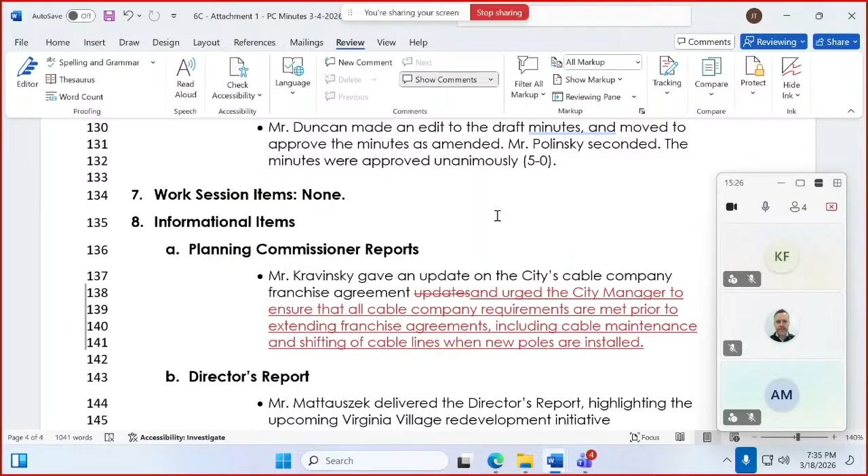Okay, that brings us to our work session. We're here tonight to discuss the 258 North Washington Street site plan. Welcome. Good evening. I'm Jeff Hollern with the planning team. Tonight you're being asked to review a site plan application for 258 North Washington Street for the Park Washington Apartments.

The applicant is proposing to add an addition to the existing historic home on this site, which includes a 3-story building containing 8 new apartments. The site is within a T1 zone and neighbors several B1 businesses along Park Washington Court.

Staff received this application on February 23rd and completed their first review on March 11th, which generated the letter and comments you have in your materials, shown right now. Several issues have been identified, including informational and technical items related to sewer and stormwater management, requiring additional clarification and review. The plans as currently submitted also have several inconsistencies with the city's comprehensive plan and downtown small area plan, especially regarding how new development interacts with historic buildings.

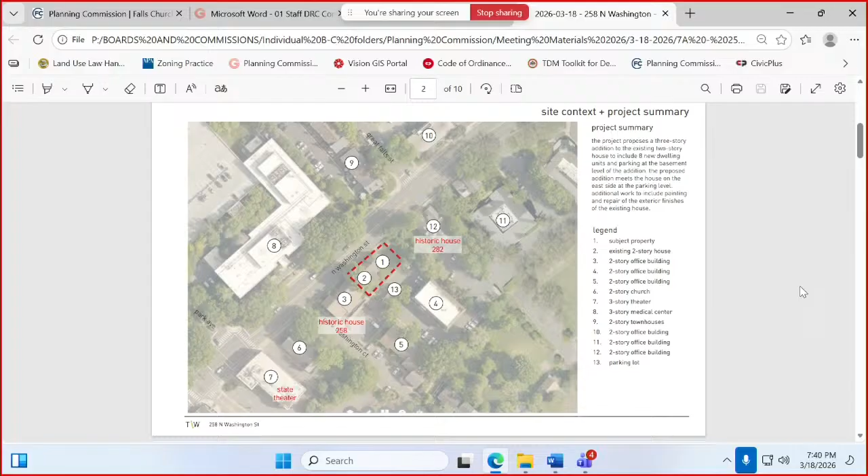I know all of you are familiar with the site, it's just like right over there. But I'll start with just some context here. So this is located along North Washington Street. It's a couple doors over from the State Theater. It is on the edge of the downtown Falls Church POA, and as Mr. Hollern mentioned, is in the new T1 transition zone. The existing house there is one of the 4 historic properties in that T-zone. The lot is around 9,400 square feet, which is about 0.216 acres, which plays into the density that we're allowed on the site.

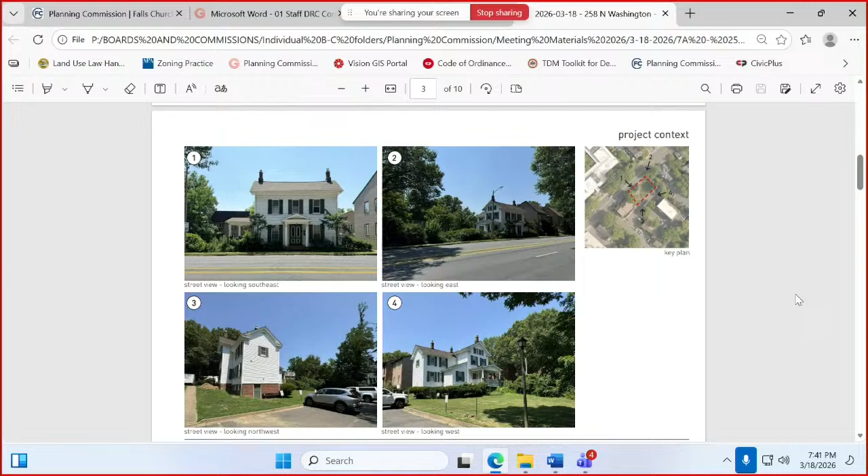The historic farmhouse sits on the southwestern portion of the site, with a significant open space to the northwest, and you can see that in the lower right photo. It's essentially underutilized space, it's an empty lot there, empty green space. There is a significant grade change across the site, it's about 8 feet of vertical elevation change from the sidewalk along North Washington down to the parking area at the rear.

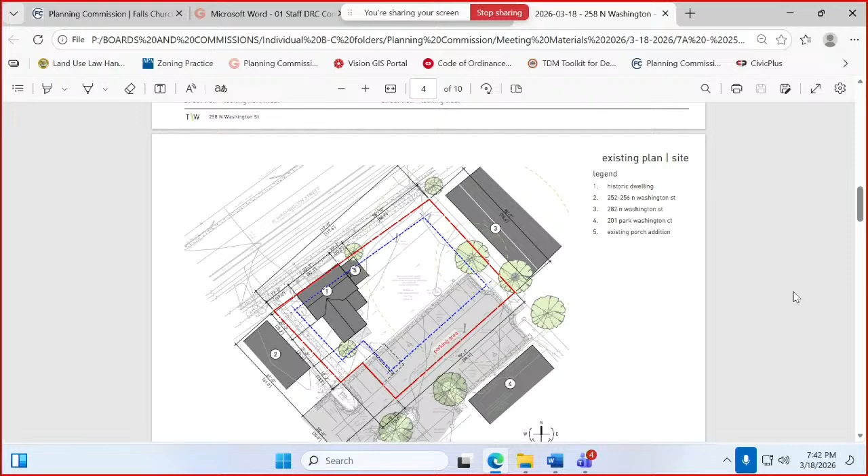So it's a pretty oddly shaped lot, it's trapezoidal in shape, and with the required setbacks that you can see in the dashed blue lines, it just introduces some difficult geometries that we're navigating with the new building. The new building will sit in that area between two historic properties, 258, which is on our site, and 282 North Washington, which sits to the northeast. These are both gabled farmhouse-style structures, with 282 being a little bit more of a Victorian style with more of the kind of gingerbread that you might see on that. There is an asphalt parking area on the southwestern portion of the lot, and that is shared with the property to the southeast. There is a shared property line that runs right through the middle of a shared access easement to that parking, so that's right along that property line.

So I'll just go over some overall project goals here. As Mr. Hollern mentioned, the project is proposing 8 new additional units in addition to the existing single-family residence of the farmhouse. The project would include a single ADU, which would meet that 10% threshold requirement, and that is being offered at 80% AMI. The project does propose a mix of 1, 2, and 3 bedroom units. And while this is a small development in terms of unit count, it provides a diverse mix of residences. The average unit size is around 1,300 square feet, and this is desired by our client to offer flexible units for families of different sizes and the potential for aging in place here.

The gross square footage of the building is around 9,700 square feet in the new building, or the addition, and around 2,900 in the existing house. We are proposing 9 parking spaces, which is the 1-to-1 ratio that was mentioned. There are also a couple of tandem spaces located underneath the building, and those are really just unit amenity or owner amenity spaces.

We are setting back from the existing house. You can see it. We're kind of zigzagging around the building there, and we're only touching it with a small terrace that meets at grade and below. Part of that was just to try to introduce some breathing room between the two buildings and the two structures. We are also proposing the new building entry on the far east corner to really just add more separation between the existing house and the new entry.

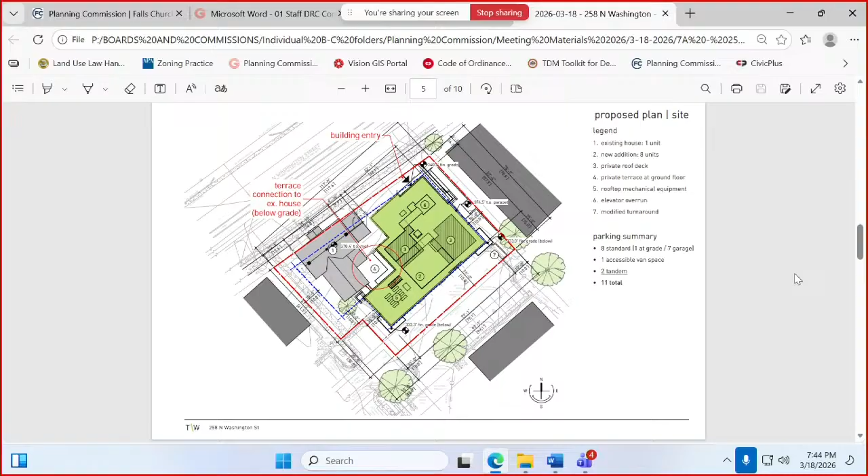This is a rendering concept view looking towards the southwest. Here you can see the entry of the new building on the left here. Again, we're trying to just create some separation between that porch entry of the existing farmhouse and the new structure to the left. We are introducing a covered porch on the new building and lining that with a wood material to soften that entry and make it a little more humane as you come into the building. On the porch on the right side, at one point we had some of the earlier schemes that maybe you've seen and we presented to HARB earlier.

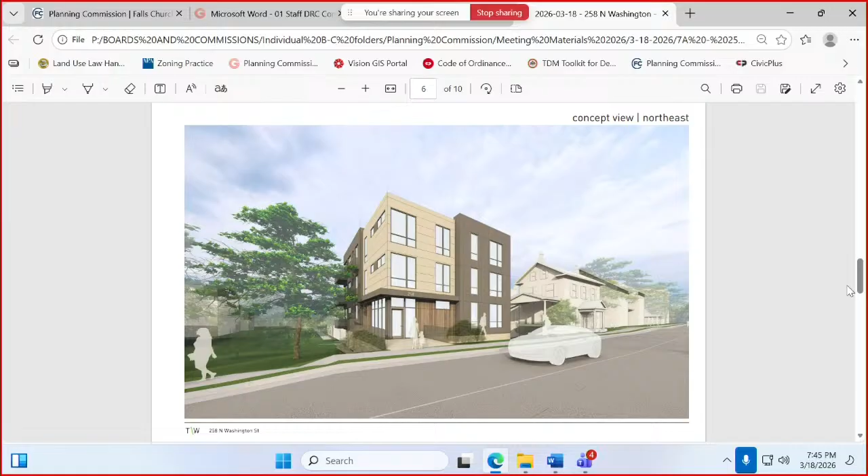Those earlier schemes had proposed removing the porch that's on the left side of the historic structure, but we've brought that back. Although it wasn't original to the building, we think it helps retain some of the architectural character of the farmhouse and helps to put a little more distance between those two buildings.

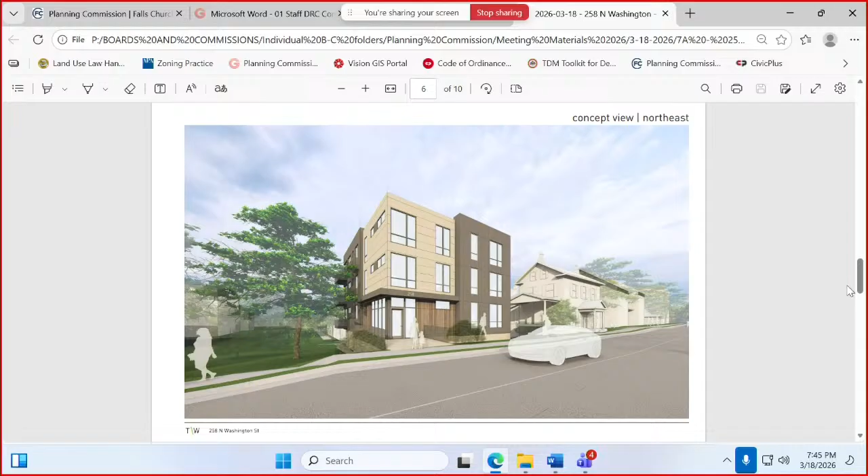From a massing standpoint, we really tried to keep it pretty simple in terms of forms and really just looking at simple materials and more of a modern aesthetic to it. It is a 3-story building. It's roughly 38 feet tall.

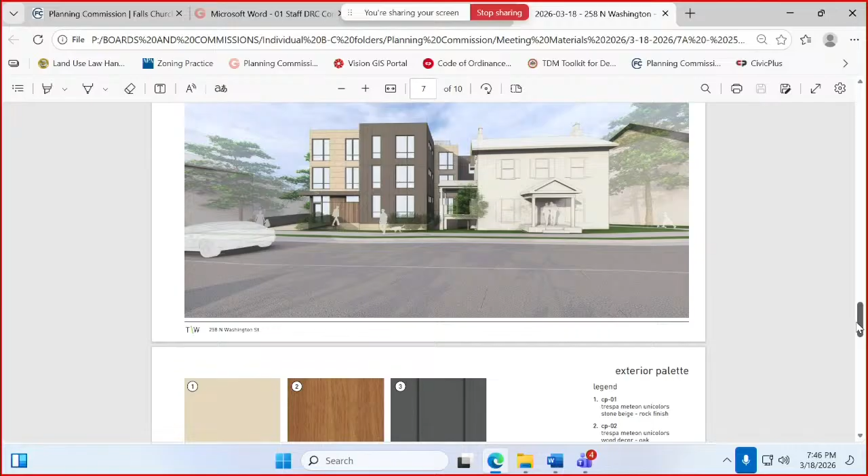Here you can see that porch element that we're retaining between the two buildings, that we brought back to help retain some of that character and to put a little more breathing space between the two buildings. And in this iteration, we are really looking at treating the new building almost like a modern expression, and really just trying to be distinct from the two buildings.

And I know we've gotten some feedback from the Architectural Advisory Board, and we haven't had a chance to react to that yet. We just got that info last week. We are working on that, and we plan to have some of those iterations within, I think, a week or so to turn them around, so we're working on that now.

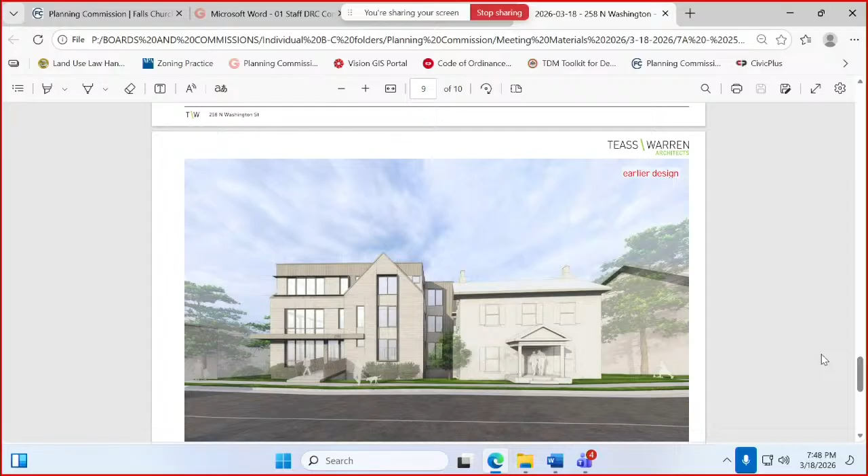But with that, I will conclude my presentation, but I'm happy to answer any questions that the commission may have.

Thank you. Great, thank you so much. I'm sure we'll have some questions. Who would like to begin? And yeah, Jack, if you could just leave that one up, I think that would be great. We can reference the presentation.

Any takers? Where's Danny? Danny, do you want to start?

So I listened in to the Architectural Advisory Board conversation last week, and I think one of the big points of emphasis from them was the difference in the newish building, the new apartment styling versus the historic nature of the original building that's currently in place. I know you said you got the feedback last week and you're working on that, but what are you thinking, what's the thought process around - is it possible to marry that? Are you thinking of marrying that? Are you still leaning towards more of a distinct style?

I think what we're trying to do is, I think it's probably too different right now, and what we'd try to do is introduce a little more material that's more compatible, like maybe a brick or something, and then a little bit more siding, or a finer grain - maybe not siding, but something a little more fine grain like siding is. And then one of the main things we're really looking at is breaking the massing down to really read like a 2-story with a 1-story piece on top of it, versus a 3-story read. From a massing standpoint, I think that would help bring it more compatible with the two neighboring structures.

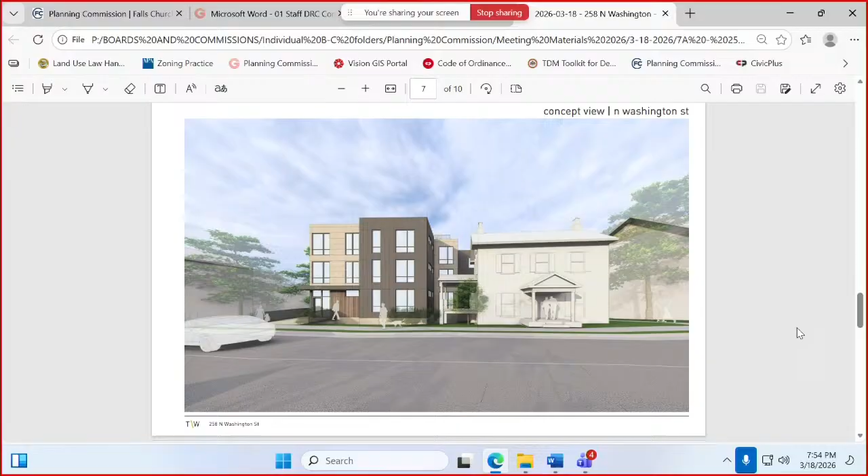I'm not an architect, but from my perspective, the original design presented to HARB has some interesting aspects in terms of how it fits in Falls Church. It's a real modern design, and even though that's my personal preference, there are people in the city who don't find that attractive. The gable work on that original design speaks nicely to the pediment on top of the porch on the historic house. But I figure no one knows better than the people spending the money to build it which piece will be most attractive to the marketplace, so I could be comfortable with either.

Staff pointed out a need for 3 bike parking spaces, and I was wondering where those would go. I think there are 3 short-term and 3 long-term spaces. We're looking at putting the short-term spaces to the left of the entry, where there's a pad area, which makes the most sense from an access standpoint so visitors could use those coming in the front door. The other area, we have a space in the garage below dedicated for bike parking.

Would the garages be pre-wired for an EV charger if somebody wanted to put one in? Probably, yeah, we're looking to do those. We've had pretty good success with the townhomes that have gone into the city recently—they've been pre-wired for EV, and some were pre-wired for solar. I realize you're going to have a green roof too, so that's good.

As far as energy efficiency goes, are you just going to build to state code, or go a bit above that? It'll probably be a little bit above that, we almost always do more. We're not currently entertaining any certifications like LEED on the property, but from an energy efficiency standpoint, I think we'll be a little bit better than code, that's typical for our designs.

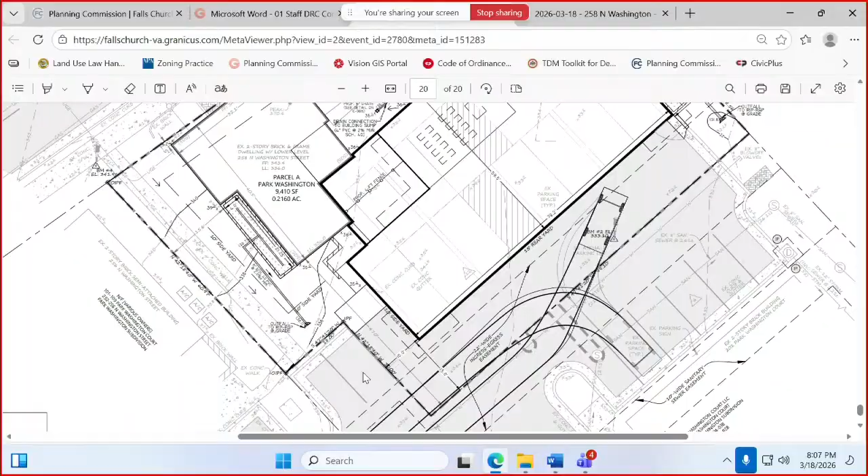So one's outside, the other 8 are inside, and then there's 2 tandems on the left side of the building that are also under the building. But just so staff could confirm, tandem spaces, you can provide them, but they don't count towards the parking space requirement. Yeah, we're not counting those for zoning compliance, those are just an additional amenity. So how do we get to the 11? We got 8 underneath the building, 1 outside the building, that's 9, plus the 2 tandem spaces, but they only need the 9, because there's 9 units. Maybe there should be a unit match.

A note on the sheet should make it clear that under our ordinance, you're only actually providing 9 spaces the way our ordinance defines parking spaces. It might be more accurate to put an asterisk or indicate 11, with parentheses noting 2 tandem, to make clear you're meeting the minimum requirement, not exceeding it.

And the elevation shows overhead doors. Are you intending to actually provide overhead doors underneath the building? The intent right now is to just have them roll up. So residents would have a remote, or they could program their car to open those doors to get in and out.

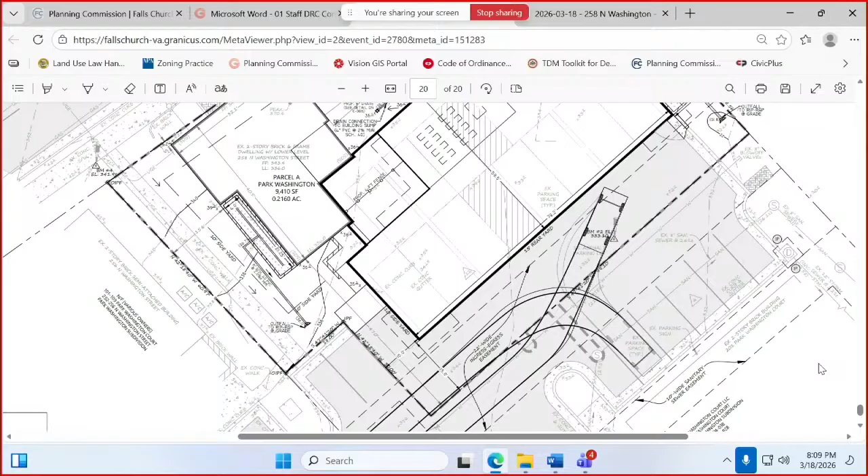I know not everyone on the commission likes to talk about parking, but on this site it's very conceivable people will need a car. If they can't fit or the spaces don't work, you're going to put a burden on the adjacent commercial owners, who I'm sure will put up signage saying don't park here, for example those spaces across what's today a common parking area. I know it's owned by a different entity, but I'm sure they'll be signing it saying don't park here. That's going to be an issue.

Unlike our other T-zone projects where there was a lot of on-street parking, there's really not here. Obviously you can't park on Washington, though there are some other streets nearby potentially. I'm thinking of access for Amazon deliveries and other things. I'm foreseeing there'll be some burden placed on the adjacent commercial owners in this area because it's going to fall on them to police that. But again, it is what it is.

All right, I think those are my main comments. Otherwise, there are no other site plan waivers being requested, correct staff? There is not, no. So that was my main question. I'll leave the architecture to the architects.

I hope you continue to improve that. But again, this is just another cautionary example of how letting things be purely by right implies that we got the ordinance totally correct, and we probably didn't. Hopefully we can learn from this and staff can continue to think about this, and maybe there are things we want to tweak as we get more experience with the T-zone sites.

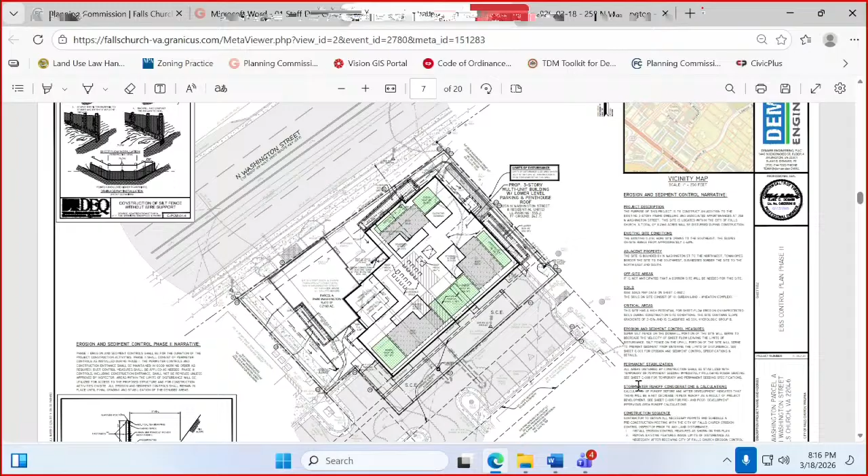Yep, from the green area that's shown on the roof, like the roof garden. That corner of the building right there is the closest, it looks like. Okay, I misunderstood. I thought it was to the property line.

My other questions really had to do with, I'm glad that somebody's looking at the parking. I did have some concern too in the garage floor plan. There are no columns in that space from front to back. And I think a column would present a little bit of a navigation difficulty, spatially. So right now, there's a span that's over 40 feet.

So I would really question how those parking spaces are laid out because the columns aren't in there. I was surprised, I didn't think you could have a over 40-foot span down there in the basement. And I don't know what sheet it's on, but the presentation is a little bit different than the sheets that we got. So I'm a little bit concerned about the intent later, if there's discrepancies through the documents, like what document are we actually talking about, what sets the intent of what's been approved.

And we saw it on some previous projects where we thought, well, the applicant really didn't mean it, or there was an extra layer on, and then after the applicant moves in we see that there's actually curb cuts still there, because it was on the original document and never got cleaned up, so it became part of the intent of what was approved. So I want to be clear about what the designated agent is approving in the intent of the documents, just to be aware of that moving forward.

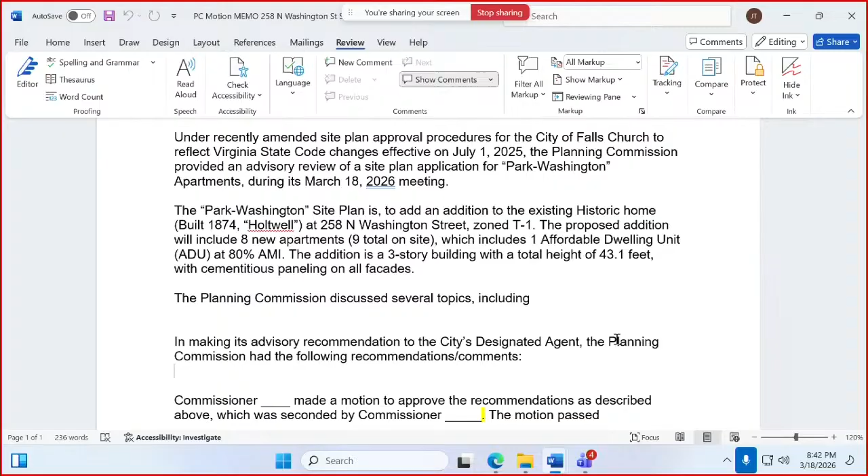Okay, following recommendations, Jack, I think we can trust you to capture the topics discussed after the fact. Is that okay? So what specific recommendations did each of you have that you'd like to include here? I heard a few from you, Ms. Friedlander—the city arborist looking at the tree species.

The city arborist looking at the tree species, the viability of the trees post-development and during construction. I'll wait for you to catch up. You were concerned about the historic house remaining in the pre-construction state, and about the renderings of the historic house. Yes, I was trying to come up with words to capture that it remain in the pre-construction status. I don't know if that captures what you have in mind.

In other words, they don't change it. The discrepancies in the documents are not an indication of any approval or acceptance of revisions to the historic structure.

I think the plans are pretty clear that it's not being touched, but the elevations include that don't match what's there today, and the elevations and renderings we saw tonight also don't match. I think when there's a discrepancy—and we've seen it happen on other projects—what ends up getting built lands in some of those discrepancies, where what was approved or discussed was the opposite, because everybody says, oh, that one was a mistake, or there's always a reason.

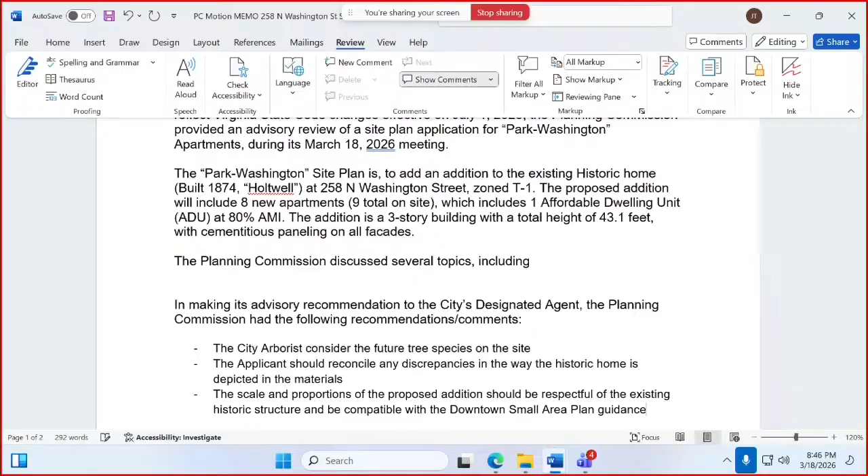Mr. Krasner, did you have an addition? The only tangible thing I had was noting that they're only providing 9 parking spaces plus 2 tandem. Depending on how you want to say that, if you're going to keep it at 11, you should have an asterisk or notation indicating 2 of those are tandem, so per the ordinance you're only providing 9. Maybe just indicate which parking spaces are tandem spaces.

The table right now shows 11. They have a zoning table on the sheet showing 11 spaces provided, but technically they're only providing 9. So if you want to mention the other ones, you need to indicate those are not defined spaces under the ordinance. However you want to note that, I think you understand. I think Ms. Friedlander has a suggestion on that one.

I wanted to add onto that, to get an actual layout with the structure and the layout of those parking spaces, just to make sure that it works.

So we have the 2 tandem parking spaces should be indicated in the materials, and a dimensioned parking plan should be provided, coordinated with the structure considerations, to confirm the parking is coordinated with the structure.

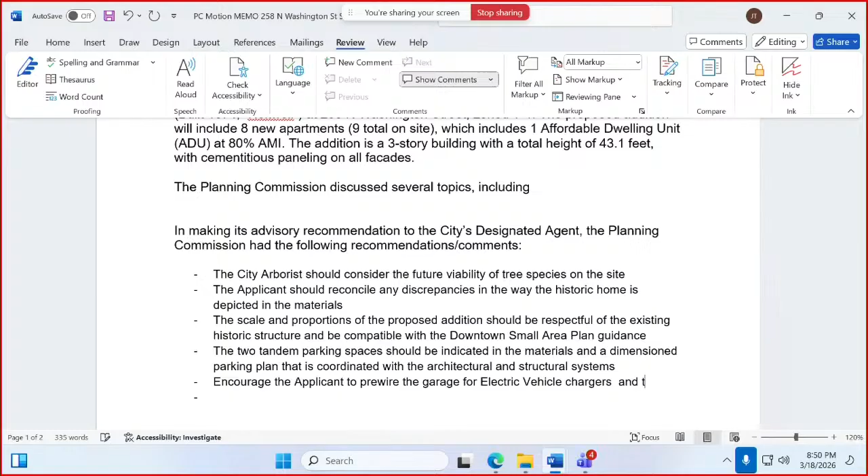Thank you. Mr. Kravinsky, did you have one? You got to finish this. Oh, good: encourage the applicant to pre-wire the garage for electric vehicle chargers and to achieve above code energy efficiency.

Thank you, Mr. Stevens. Mr. Kravinsky, I think this is different from the comment about scale and proportion, but do we want to make a comment that we encourage the applicant to revisit the original gabled design from 2024? I don't have strong feelings about that. Do other folks want to make that recommendation?

I think there was some discussion that the square design was not as compatible with the historic structure. I don't know, does anybody have thoughts?

I like the juxtaposition personally, my personal opinion, of the modern with the historic structure. I think incorporating the materials to sort of speak to that historic structure would help in that regard. So I prefer this design personally to the gabled one.

I think we kind of start addressing that here with the scale and proportions of the proposed addition should be respectful of the existing historic structure and compatible with the downtown small area plan guidance. That doesn't speak to the materials though.

Maybe we could add to that, or talk a little bit more about changing that. I thought there was some discussion tonight about the gabled roof being more compatible, but you make a good point—maybe what you're going for is the juxtaposition of the square and the gabled design.

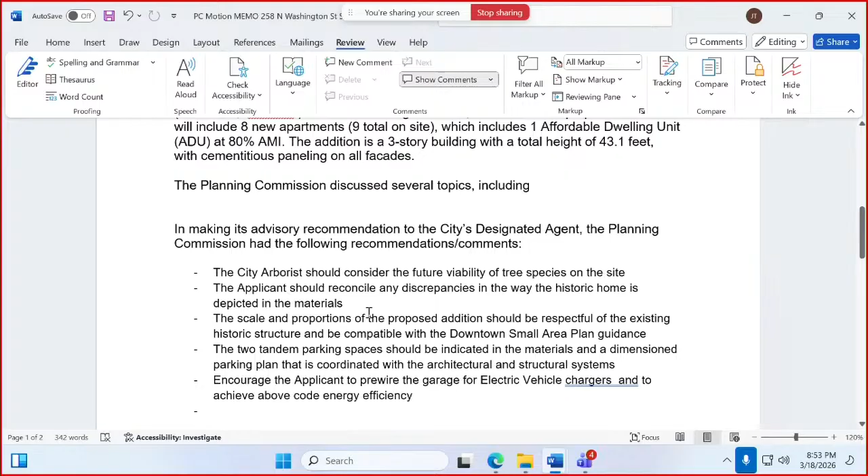Okay, that's where I'm coming from. Could we add materials into this recommendation though? Could we say the scale, proportion, and materials of the proposed addition should be respectful of the existing historic structure? Because I feel like we did talk about materials. Is that okay? So it would be scale, comma, proportions, and materials.

Well, it's design too, though, right? Sorry, what was that, Mr. Stevens? Did she have design in mind as well as materials? That might be what I was trying to get at. So do you want to say design, comma, scale, comma, proportions, and materials? So in front of scale, put the word design, comma, space. Does that make sense?

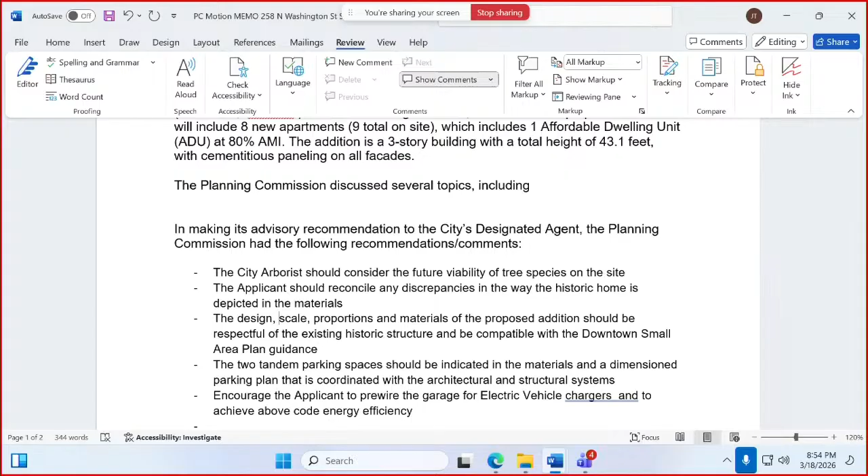That gives the applicant the flexibility not to say it has to be X, Y, and Z specifically—very general, but it gives room. Okay, is that right there: design, scale, proportion, and materials of the proposed addition? Yep, yep. Okay, I'm gonna turn this way.

Anybody over here have anything to add to the list of things our designated agent should consider? Mr. Duncan: my addition is to ask the applicant to designate one of the multi-bedroom units as affordable. I'll give you a pass on telling us how much any of the units will cost if you give me that first one. And I do think it would be appropriate to ask for clarity on multi-bedroom units—he mentioned there might be 3 bedrooms, so that could be a 2-bedroom or 3, as long as we don't cheap out and just do 1-bedroom. That's my objective. Okay, you got that, Jack.

The other thing is to make sure the materials show with clarity where the service delivery location is for all the Ubers of the world. We ask for that now reliably on any special exception building, and I think it's appropriate to get in the habit of asking every developer to think about that from the start, not as an afterthought. Thanks.

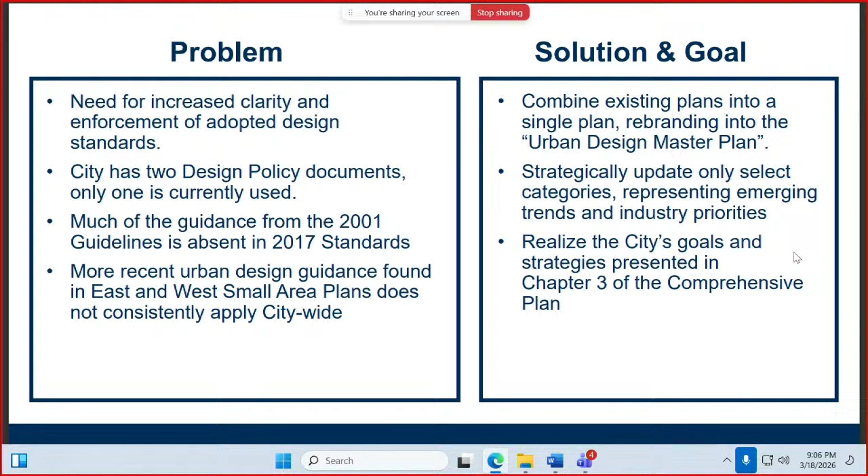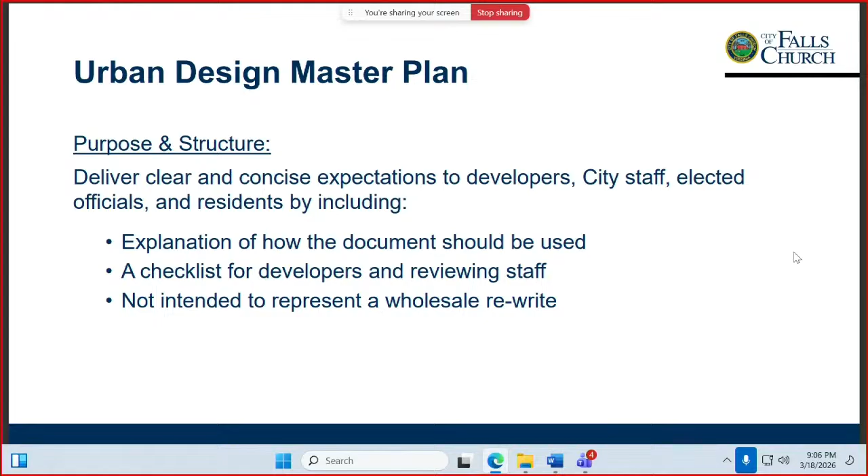This reiterates our goal: to give clear guidance to developers who come to the city to build, city staff who are reviewing these site plans, elected officials who are voting on these projects, and residents who are trying to follow along with consistent messaging and guidance.

As we go through the public process, the idea is that as we meet with boards and commissions, we have a discussion about whether there are new concepts we're not thinking of to add to this plan, or old concepts which should be looked at or revised beyond what we're showing, but to leave as much as we can the same, because it is good guidance. It's just that a lot of it is in an older document that is no longer referenced, and it's kind of confusing to have sources of information in two different places.